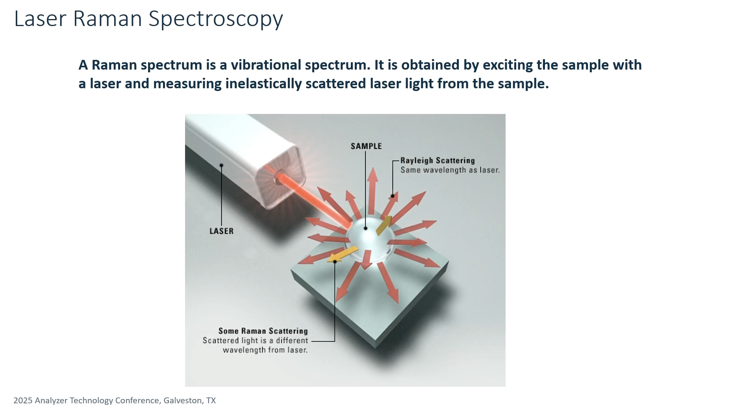But I got to go to my favorite teaching slide. So what Raman is: it is a molecular technique that takes advantage of this light scattering phenomenon, this inelastic scattering. It does provide qualitative and quantitative information on your sample matrix. It's a relatively weak process, which some of the previous talkers have already mentioned. It is accessible to solids, liquids, and gases.

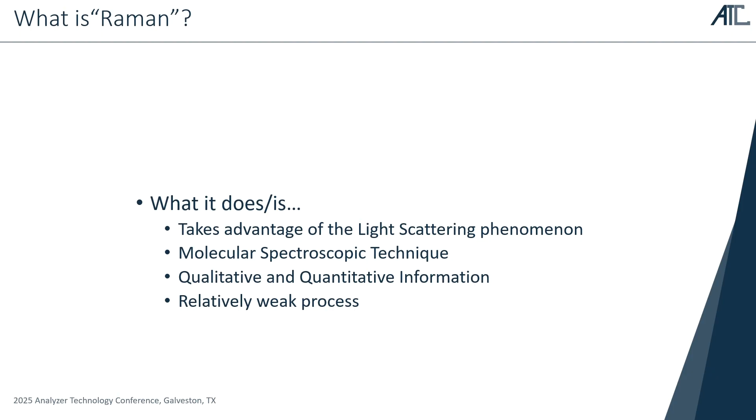But what is it not? Anybody know what's coming? I was going to go get one and then throw it to anybody who guessed it. So notice the slight spelling difference, right? I get this a lot, and everywhere you talk about Raman, it's like, yeah, it's not that.

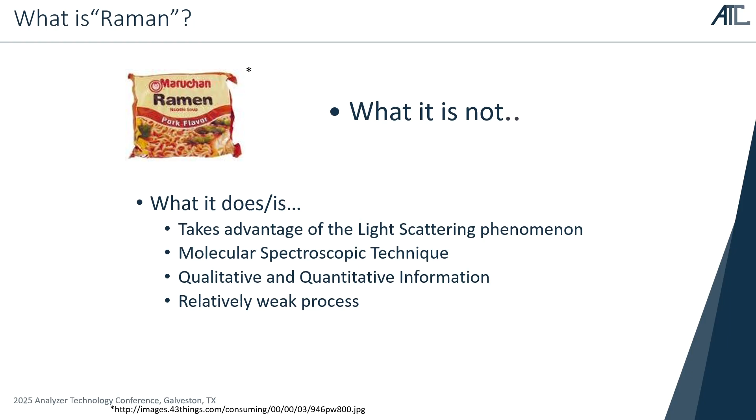But what it is is what we talked about, and we talked a little bit about Stokes and anti-Stokes. Again, if the scattered photon has the same energy, what came in came out, that's Rayleigh, we don't learn anything. And that's indicative of the big peak that you see in the center at the excitation, there's no change. With anti-Stokes, that photon actually gains a little bit of energy, and with Stokes, that photon actually loses a little bit of energy. And that gain and loss of energy is responsible for your excitation energy interacting with that molecular vibration.

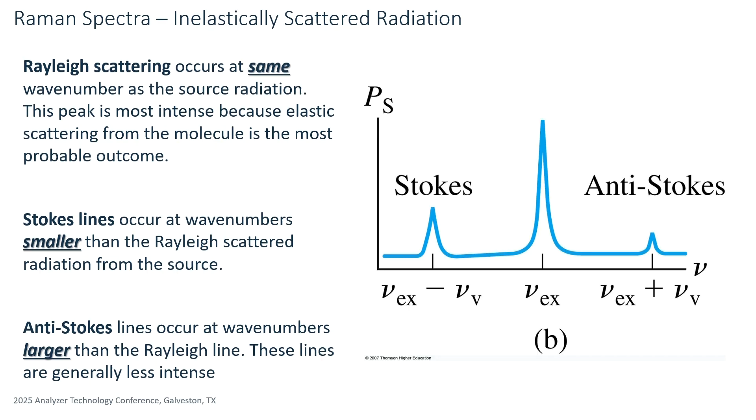Where are we all right now? We are in the ground vibrational state or ground electronic state because we just got up. Where were we last night at the open bar? Well, we were slightly elevated. We may have been in the ground electronic state. We were definitely in an excited vibrational state.

So that's why that delta in your peak intensity between Stokes and anti-Stokes occurs, because that molecule already has to be in an excited vibrational state in order for it to go to this virtual state and back down. Now, virtual state, it's very difficult to explain and to get buy-in on what a virtual state is.

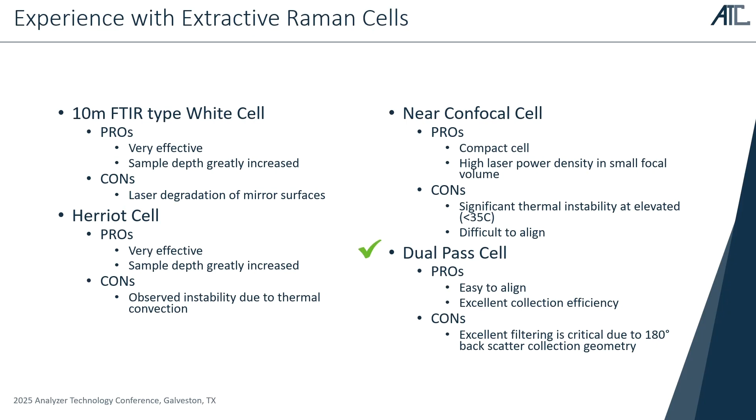So I decided to take a strong look at those individual components and see where we could eke out a little more energy, eke out a lot more signal, reduce our noise without having to go to some exotic multi-pass type cell. So some of the constraints: I want to keep that 180-degree backscatter. Why? Because it's easier to maintain that alignment. Just think, if you're trying to come in from the side and stare at a focal point of a laser at all times, that is a lot more difficult than when the beam is always in line with your collection optics. And I'll show you a little schematic here that'll make that a little more clear in a second.

Can't step on my $7 DG reading glasses. If you ever get LASIK, talk to me about it. It's not worth it. You trade one set of glasses for 5 sets of other glasses.

This public service announcement, that's free.

So something else we want to talk about is the spectrometer itself, getting that light to it. We're going to maintain the fiber optic. That way you don't have to worry about the collection arm being continuously aligned with the slit of your spectrometer. And then the spectrometer itself. We've used one spectrometer. It's probably the same spectrometer you think of when you hear miniature spectrometers, same company.

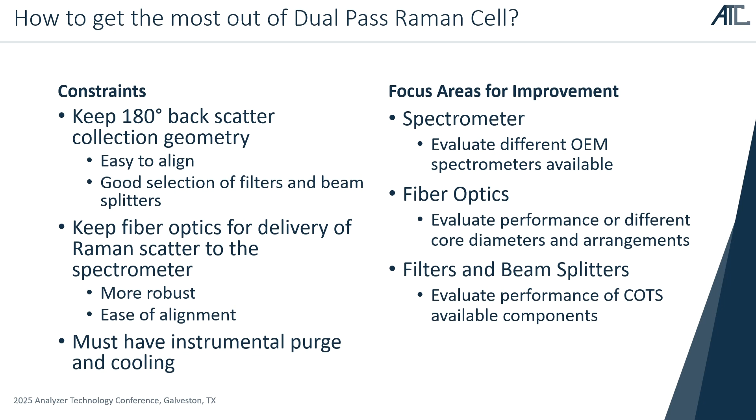But we started coming into some trouble with some of our other systems, specifically our OpenPath UV DOAS system, with changing models. So we started looking around at what other miniature spectrometers were out there. And so we started finding some others, and I wanted to compare and contrast at least 2 of those, and that's the data I'm going to present here today. The filters and the beam splitters, plenty of options available to us out there.

Now here, we're not interested in the Rayleigh scatter. Remember, green in, green out, we didn't learn anything. That hits the beam splitter this time and is redirected back toward the laser. However, that longer shifted Raman or spectrochemically relevant information passes through your beam splitter. And then it is collected by your focusing optic. There's a notch filter there.

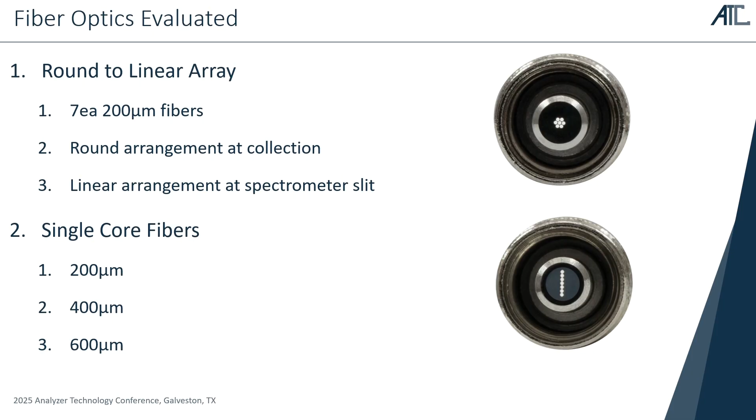What I did was I took just compressed air, put it into the analyzer, I chose the different fibers, and optimized each individual spectrometer, ran the oxygen and nitrogen through it from the compressed air, and then looked at the quality and reproducibility of our oxygen and nitrogen peaks as a function of not only spectrometer, but also of fiber.

One problem with multivariate analysis techniques is if your reference data is set to a certain standard deviation, and then you're getting data that's bouncing around that, it's gonna see that as a change in concentration, which is not necessarily the case. These are all continuous concentration, continuous flow. So I kind of zeroed in on that, and I wanted to see what it looked like.

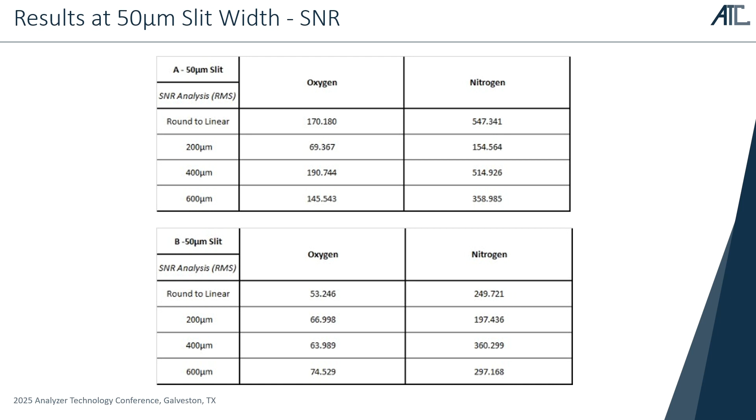So that kind of intrigued me on how this might be a better approach to our spectrometer selection, even though it's not optimized for our laser wavelength. So what are some abilities? I know we all care about oxygen, nitrogen, or we'd be doing the kicking chicken right now, right? But in terms of spectrochemical relevant information in your process, maybe you care about other things.

So what we decided to do is take some blends and some hydrocarbons and evaluate the spectrometer's ability to differentiate those different hydrocarbons. It was 7 different hydrocarbons and nitrogen and hydrogen in these blends. And you can see that the correlation curves are really good.

Now, how did I develop these correlation curves? You build your reference data set, you validate your methods on that data set. That's called verification. And then you run an entirely new data set through it. I call that validation. The first, I call it cheating. You're using the same spectra that you used to develop your method to validate your method. Okay, that's a little iffy. But come back the next day, throw something different at it, see how it performs, and then later on, continue to throw additional fresh runs at the model to check its robustness.

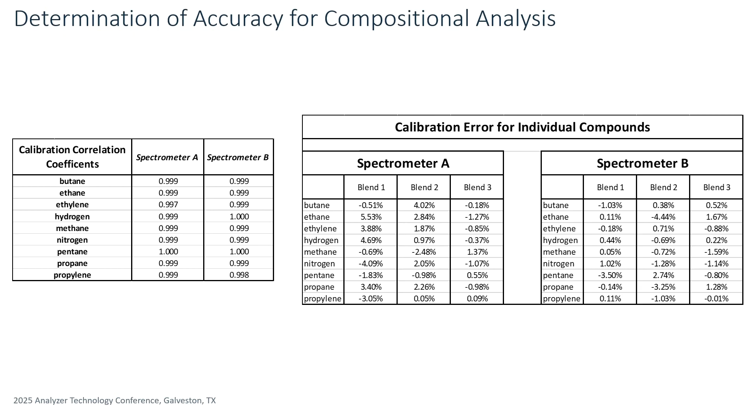What if we wanted to use this to determine your net heating value? How well would these 2 spectrometers be able to perform in that application using the EPA's PS9 evaluation criteria? Well, luckily, we have a consulting group that had all these calculations in a single spreadsheet, or I would really bore you to death with my Excel abilities to produce graphs.

So here is the PS9 results from spectrometer A. And what do you notice about that besides the red? All right, the red was where it did not pass. There, the requirement is 0.995. It came close, 0.993, but why did it fail?

If you look at your reproducibility, you can see those numbers change from the first blend to the second blend, and we are sitting about 1% or so in precision, but if you look at the calibration error, it's sitting around 1 to 3. And again, why is that? Because not only is the peak shifting on your x-axis, but it's also shifting in your intensities.

Now, solve that with TE cool? Yes, it does have a TE cooler. So I think that it's pretty much approaching its limits in terms of reproducibility, but how did spectrometer B perform? Now notice not only the calibration error, but the precision and also the linearity is also where it needs to be.

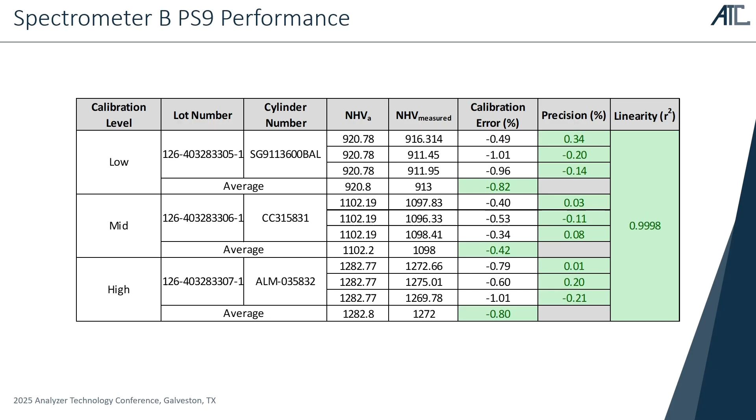So some summaries. Really think that this 2-pass cell is going to be the way to go. It does have the limitation, if you want to call it, of bringing the gas to the sample, but you can either run fiber lines or you can run gas lines. Either way is the way to get the information out of your process.

Now, these detection limits that I put up here, 0.75% to 0.1%, these are what I call the red face limits, right? I could stand there and get yelled at all day long and say, yes, I can see that. Can I see lower? Yes, we can see lower. It's very dependent on your molecule, your compound of interest.

Some people mentioned, I don't know if they mentioned it or not, it's called the Raman cross-section. That's the ability of that molecule to scatter your Raman signal so you can actually pick it up. Now, liquids, very easy. Solids, even easier than liquids. Whereas gases, way over here. They're very difficult.

Why? Because your molecules are spread apart. There's not a lot of intermolecular interactions. So it's very difficult for Raman in gases. As a matter of fact, when it first came out, it's like, just don't even bother. But we've advanced our lasers, we've advanced our spectrometers, we've advanced our optics, and that's why you're starting to see a little more conversations that involve Raman.

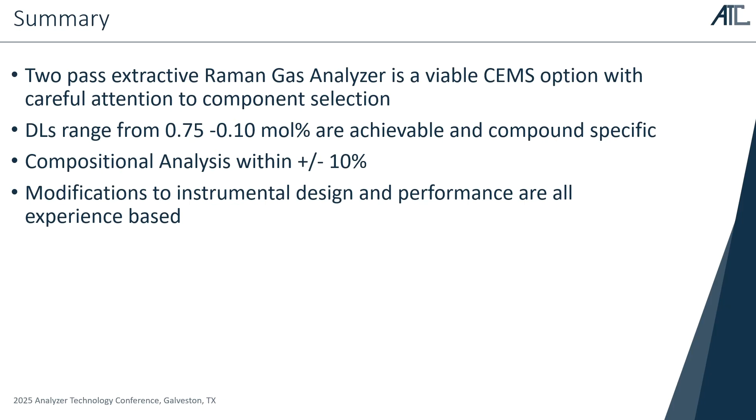What we have done is taken all of that 100-pound brain stuff and applied it to how to make it simple, make it simpler, make it more efficient, make it as good as it can be in terms of limits of detection and reproducibility. What's the end goal? To get this AMP. We met last week.

We've generated the request. We're sending it off to EPA, focusing in on the net heating value, but also with your individual component ability. And we hope to get this approved soon. And that will go a long way to assuaging any angst out there about using this technique or this capability. We're ready to go. We're ready to build it.

We have the instrument that I used to collect all this data down in our booth at 627. Again, we learned a lot from that. We made it a lot simpler to get to things, and also cooling and instrument purge. That was on my slide before, because you do pick up Raman scatter from ambient nitrogen. That gives a little variability that we can eliminate by eliminating that air background inside of the analyzer itself.

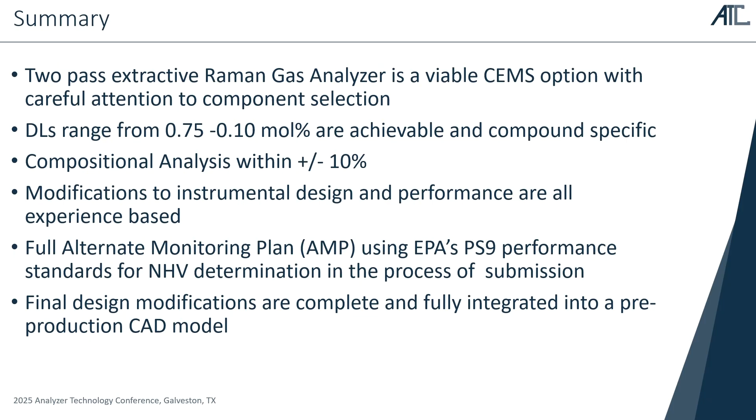And if you compare and contrast what this looks like to what our analyzer looks like down at the booth, you'll notice this is a lot simpler, a lot more access, and a lot easier to maintain and to keep aligned.

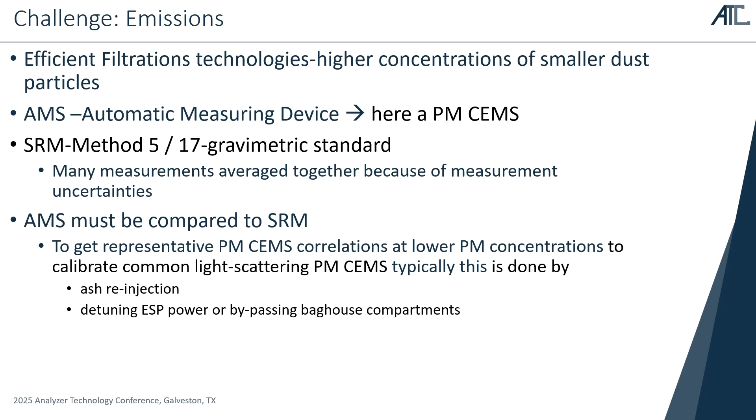So here's an example of the gravimetric reference. We compare that to the optical particulate monitor, and then make sure that it correlates properly. So we can use Method 5, which is out-of-stack measurement, grab samples, or an in-stack method of measuring the gravimetric standard. It has to comply with PS 11, Performance Specification 11, outlined by the EPA. So you have to do multiple iterations and average those out and make sure that it's reacting properly.

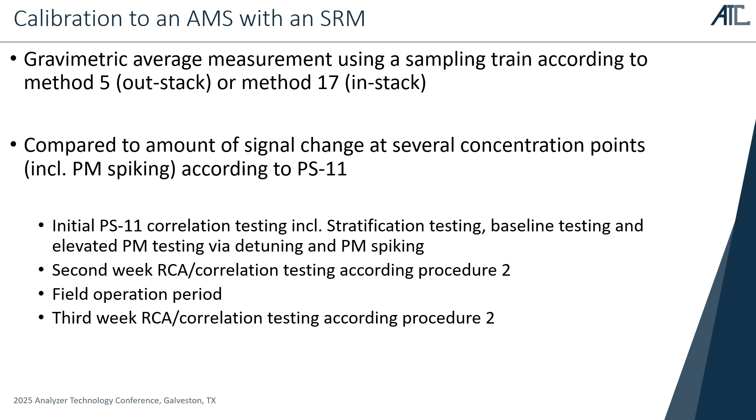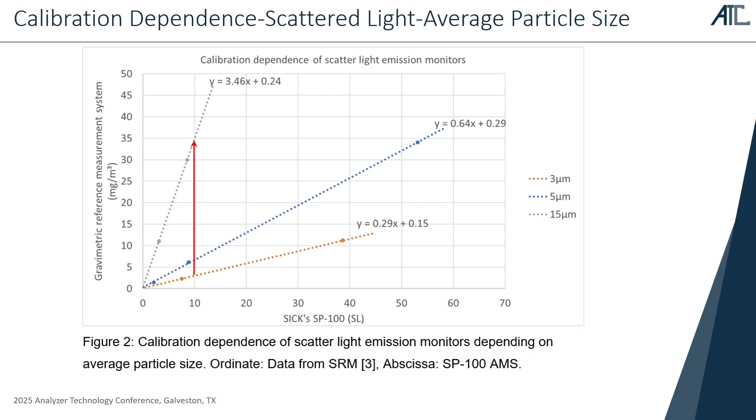And the PS 11 correlation testing usually takes 2 to 3 weeks to do. It's very involved and very expensive. So this is showing different size particles from 3 micrometers up to 15 micrometers. And light scatters differently, is affected by different particle sizes, and usually optical measurements take an average size. So if you have a lot of large particles versus small particles, it can skew your measurement.

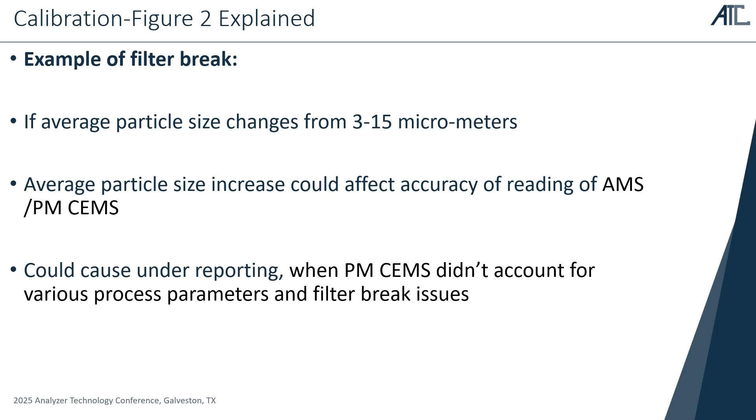So if you had a filter break, for example, and you had an average particle size increase that was due to maybe having a few larger particles versus smaller particles, you could end up under-reporting the total PM particulate monitor loading.

So here's an example of some of the filtration technologies. On the far left, there's an electrostatic precipitator where they charge the electrical plates to create a static charge, and it attracts the particles, removes them from the stack. Very, very efficient operation. Then on the right-hand side, we've got traditional mechanical bag filters. So you have fabric filters that will filter out the particulate. Once they get full, either there's a mechanism to empty them automatically, or sometimes they have to replace the bags. But if you don't pay close attention to it, the bags can rupture, and then you can get a spike of particulate matter going up the stack.

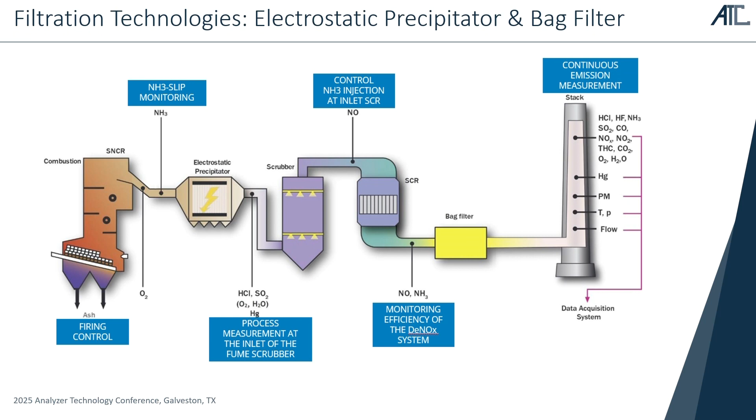If you have an issue because there's the larger particles and you don't know how many of them there are, and you get an inaccurate reading, then there's a signal sent to the ESP to ramp up that power to make it more effective, and it really didn't need to, because it's not a true particulate loading. It's a false reading, but it causes your ESP to work a lot harder than it has to, and uses up a lot more power.

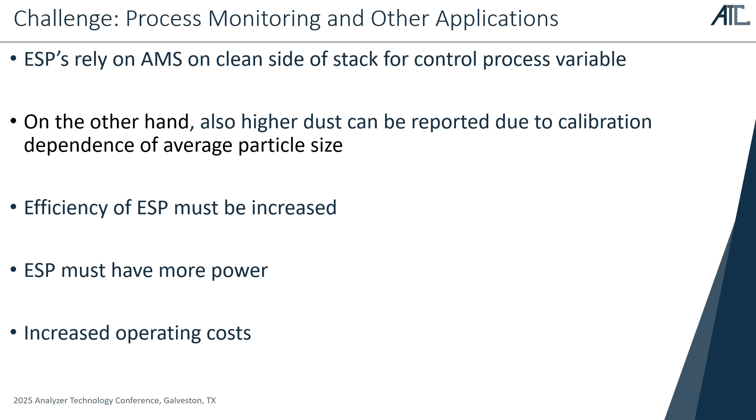So our proposed solution, and this is an emerging technology, I can't sell you one of these today. We've been working on this for several years, but it did escape from the lab. So we've got 10 industrial demonstrators that have gone around the world and been put into various applications, a lot of them in the power industry, but we're looking for other industries as well to apply the technology.

But what if, instead of just getting a total PM, particulate matter number, you could know exactly what the sizes are and the concentrations of those individual components from 0.1 to 30 micrometers. So this is what this technology is designed to do. It uses wavelengths of UV to NIR, so it has multiple sources of light, and also has multiple highly sensitive detectors, and then some mathematical modeling to come up with the PSD levels.

But initially, it needs to be referenced to the SRM, the reference method, but the hope is that we get the EPA to buy off on it, that once you've done this initial calibration, now you're making a direct mass measurement continuously, so you'll not have to do that testing on an annual basis, which is something that we haven't got approved with the EPA yet, but they're looking at the trial that we're doing in the U.S. very closely. So that would be a game changer. That would save the industry a whole lot of money.

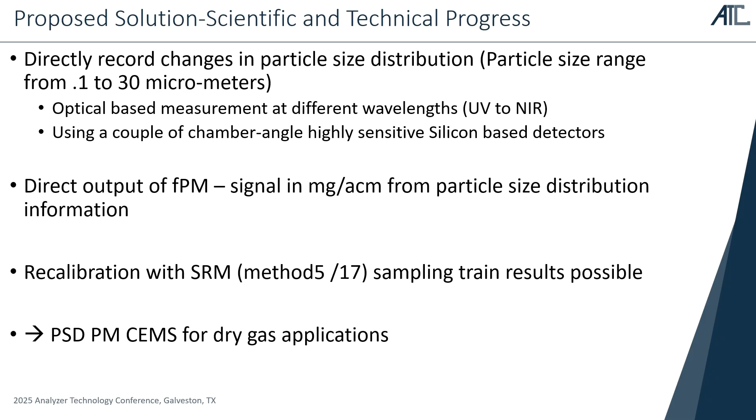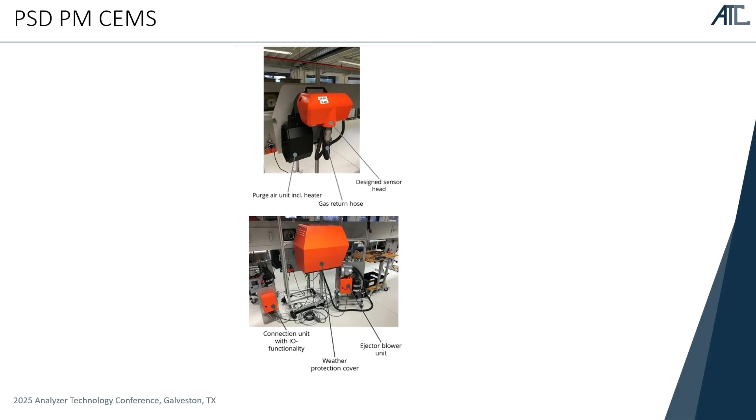So on the top is the actual sensor housing. Then we've got a purge air unit, and then the bottom picture there just shows a shroud that goes around it to protect it from the elements. It's a close-coupled extractive design, so you only have to have one flange, so it's very easy to install on the side of the stack. The unit that was installed in the U.S. went in, and in one day they had it installed, commissioned, and up and running, so very easy to install.

We've only had 1 year of run time at one location, so cleaning intervals are going to vary as far as the optics, but in that 1 year trial, we did not have to clean the optics.

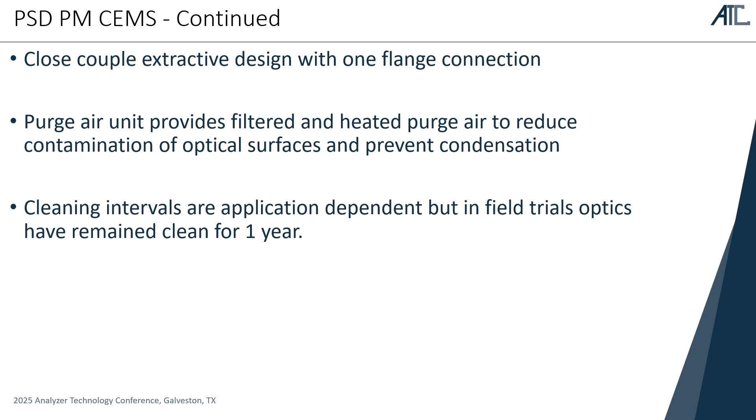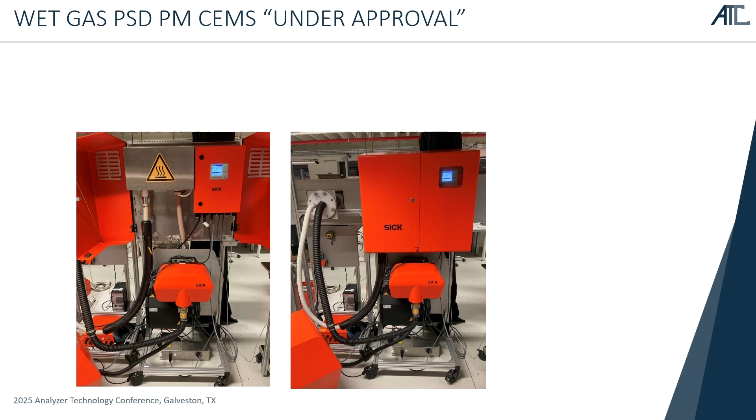So the wet gas unit that we're working on, we're hoping that will be a great success, because there are a lot of coal-fired power plants in the U.S., 80% of them are wet gas, and unfortunately the first one we developed was dry, so they retooled it and came out with the wet gas so that we could go after a bigger market size in the U.S.

So there's a thing called the MATS rule. It's a mercury air toxics regulation that came out in July of 2024, and it reduced the permissible level of particulate by 2/3. So it went from 0.03 pounds per million BTU down to 0.01 pounds per million BTU.

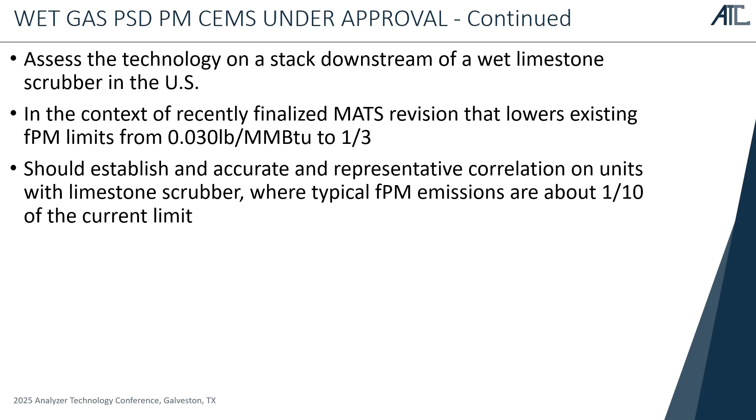So it's inherent that you continue to push the envelope and develop new technologies to get to lower levels of concentration, as well as the PSD gives them some additional information to be able to modify their filtration technologies to stay ahead of the EPA regulations.

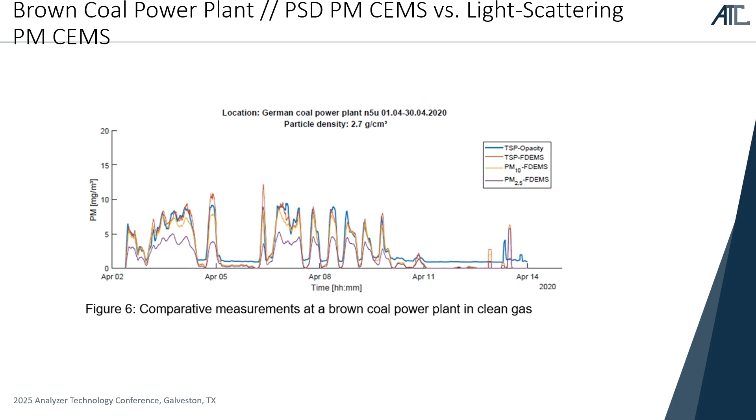And I apologize for this particular diagram here. This was a test that was run about 6 or 7 years ago, so they couldn't recreate the data for me and separate it out and explode it up and give us a good, clear view of what's going on here. But the blue line is the opacity from the existing optical opacity meter that's measuring total particulate level, and then the red line is the PSD total particulate, and it tracked perfectly on the total line.

But what the PSD gave you was the concentration of the individual particle sizes, the PM2.5, PM10, and the PM1. And so it was able to show a richer data set. So now they could tell that almost all the particles were below 10 micrometers. 50% of them were smaller than 2.5. So it gives them the information necessary to modify their filtration strategy to make sure that they eliminate those smaller components.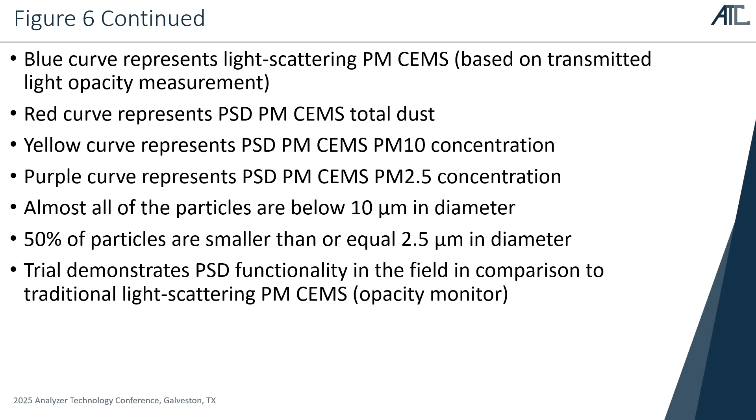So in conclusion, we are demonstrating this emerging technology for PM CEMS. It'll be a revolutionary device that, if approved and in place, will reduce the cost to industry to do the annual testing.

If you can do the first test and then let it run forevermore, and be confident that you can get the PSD, the PM1, PM2.5, and PM10 particle concentrations continuously, it will help the industry, because with that MATS rule, there were hundreds of power plants that were grandfathered and only had to do annual testing, but now they have to put in continuous PM CEMS. So they'd like to move to the next generation, which gives them a much richer data set and ability to modify their filtration strategies to stay ahead of the EPA regulations.

So it's a close-coupled extractive design, so there's no need to align optics. Everything's pre-aligned. It's very easy to install. From an expense standpoint, it's minimal and very convenient. It uses a scattered light principle and multiple wavelengths of light, and several highly sensitive detectors and mathematical algorithms to make that continuous PSD measurement.

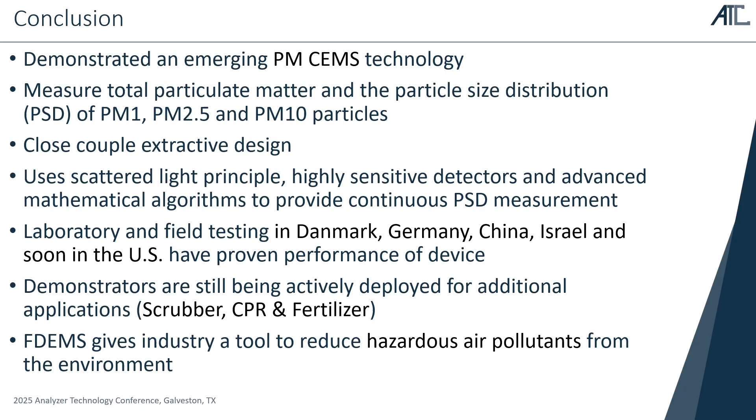And like I said, it escaped from the lab, so we've had it lab testing around the world, and also 10 industrial units that have been put in the field, grabbing empirical data to refine the design. And then we're still looking at other markets like chemical, petrochemical, refining, and fertilizer to put additional demonstrators in to prove the concept. And so this gives the industry a PSD tool to help you minimize or eliminate hazardous air pollutants from particulates. And that is it. Any questions?

Thanks, John. Do we have any questions about the presentation? I guess I have a question. Would this be applicable to municipal waste incineration, that sort of thing? Yes. And do you intend to target that market? That's not one that we have talked about, but cement is a target market, and as we all know, cement plants get extra money to incinerate medical waste and tires and things of that nature. So anything that burns and produces particulate matter would be a potential target.

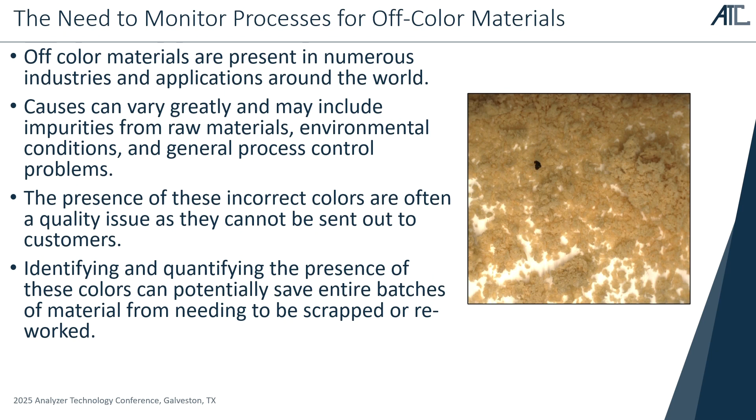So here's an introduction to vision technology and dynamic imaging. As I mentioned, dynamic imaging is the basis of our analysis, which utilizes a camera and light to take constant images of material as it flows between the camera. This technology is used in a wide range of applications across many different industries.

Other examples of applications where dynamic imaging can be used are for monitoring, for example, a produced water stream where you're trying to pick up on oil and TSS in the water stream. With dynamic imaging, Canty is able to provide both concentration and oil droplet size, which is very important for being able to efficiently separate oil and water.

Another application we can do is monitoring the foam in tanks, if you have any foaming tanks or vessels. Based on the intensity of light that the foam emits, we're able to set a certain threshold and communicate with your control system to inject anti-foam once it reaches a certain level. This is a major cost savings opportunity because operators are constantly injecting anti-foam because the only way they get in trouble is if you have over-foaming in the vessel or tank.

So going back to this specific application of off-color material, dynamic imaging has to be able to determine the difference between bad material, good material, and background material, which in this case is most likely going to be a conveyor for crumb rubber. We also need to be able to quantify the amount of bad material. This can be count of particulate that is off-color, as well as size or shape of the off-color material.

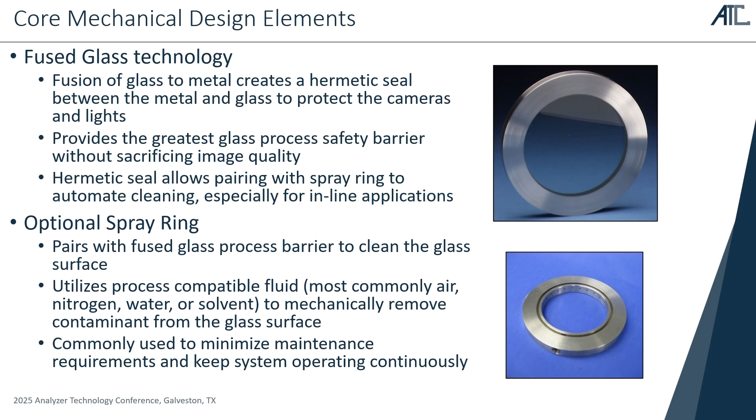So now I'll move into the lighting design. At Canty, we say that there are 3 keys to a quality image, 1 being lighting, 2 being lighting, and I'm pretty sure you can guess the 3rd, which is also lighting. With inconsistent lighting, you'll get inconsistent imaging, which in turn has inconsistent analysis. Canty has developed an LED light with a fiber optic bundle. This produces a constant, consistent white, bright light. But this also has minimum maintenance, as the light has a lifespan of over 5 years.

And as I'll dive into in the case studies more, oftentimes multiple lights are used at different angles. This will eliminate any shadow impacts to ensure that the images stay clean and clear, and this way we can perform accurate analysis with our software.

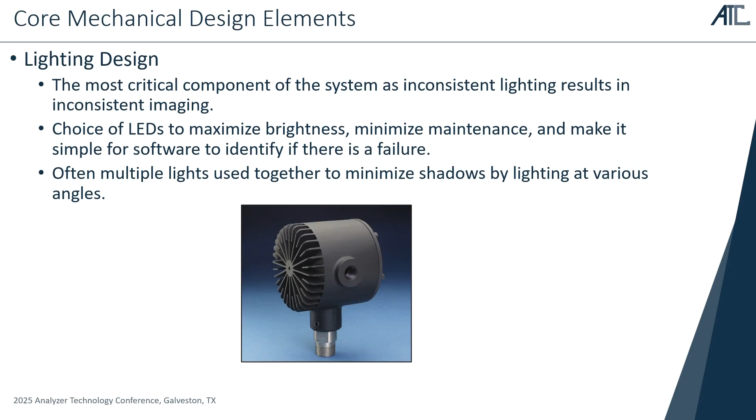Finally, the last part of the core mechanical design is the camera optics. Canty has different camera optics that can be used depending on your specific application. We'll pick one to make sure that you have an adequate view angle to ensure that you're getting the whole field of view for whatever your application may be. Each Canty camera optic has a certain pixel scale factor, which is the number of microns per pixel. For the specific application I'll be talking about today for off-color material, we'll select a pixel scale factor that is small enough to be able to pick up on all required color contaminants.

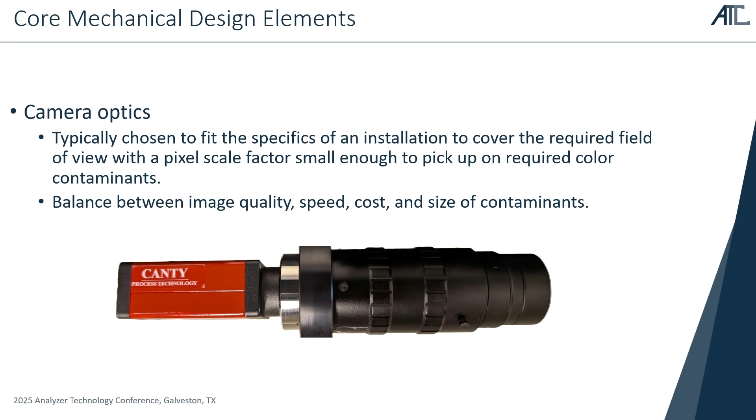So now I'll dive into the case studies. The first case study was performed at a crumb rubber plant. This was a lab analysis study. Their typical method was taking samples and analyzing them just by manual inspection and counting contaminants. Just a little bit of background. The cause of the bad color was typically due to the drying process of the crumb rubber. During heating, oftentimes particulate would get stuck on the wall, and as it stayed there, you would get some color change from the white crumb rubber, which it is supposed to be, to yellow and sometimes even black.

So just a quick couple points on lab analysis, which is the first case study. Lab analysis is a great proof of concept of the technology and for getting familiar with what it can provide, but it has certain limitations that will prompt a user to move directly inline later. One limitation is that you're not getting constant analysis. You're only pulling samples from a certain point in the line, and you're making an assumption that that's a true representative of the process as a whole, which we all know is not going to be the case.

A second limitation is you're getting a slow response time. For this specific application, they had someone go into the field, obtain a sample, run it back to the lab, prepare the analyzer, run the analyzer, and then analyze the data. By the time you analyze the data and pick up any off-color material, the bad material has already made its way to a bale, and I certainly wouldn't want that job of trying to determine which bale has that off-color material. And oftentimes, this can result in them throwing away many bales because they don't know which specific one had that contaminant.

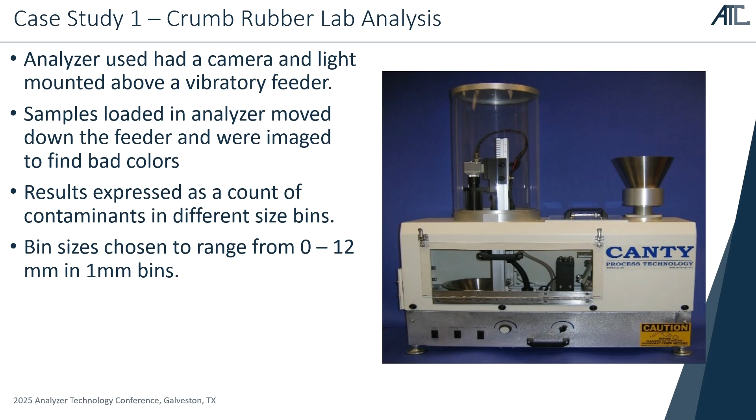For this application, results were expressed as a count of contaminants in different size bins. We're able to get particle sizing based on the pixel scale factor that I previously talked about. And bin sizes were chosen from 0 to 12 millimeters in 1 millimeter bins.

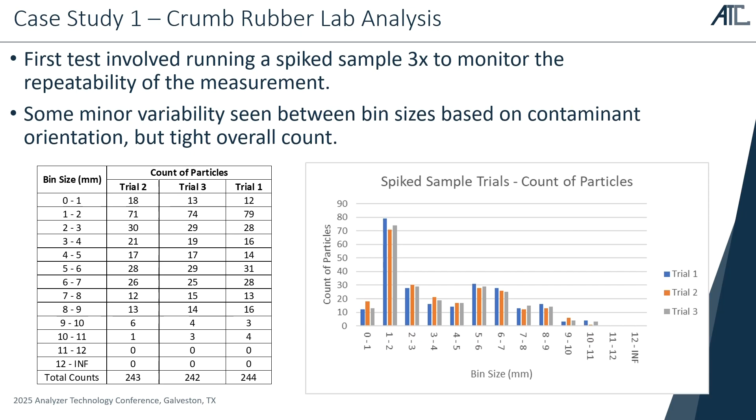So for this case study, the first test involved running a spike sample 3 times as a proof of repeatability of the analyzer. It's hard to see in the table, but results show great consistency and proof of repeatability of the analyzer, as the 3 different trials had pretty much exact total counts of particulate. The graph on the right shows the bin sizes that each of the trials had for off-color material. As you can see, the results are pretty consistent for this as well. There's some minor variability, but this is due to orientation of the particles as they present themselves in front of the camera.

So after proving the repeatability of the instrument, a second test involved running 10 samples that were taken over a span of a week of process time. As they were run through the analyzer, they were compared to the plant's manual inspection of the material for off-color material. The analyzer showed consistent results with their manual inspection, as we were within plus or minus 5% of their manual inspection. This table brings another point I wanted to make about lab analysis and its limitations.

It's hard to see, but you can see sample 8 had a total count of 127 particles that were off-color material. The rest of them didn't have nearly as much, but because you're not sampling all the time, you don't know that between sample 3 and sample 4, for example, there could be a spike in off-color material, and you wouldn't be able to tell because you're not sampling continuously.

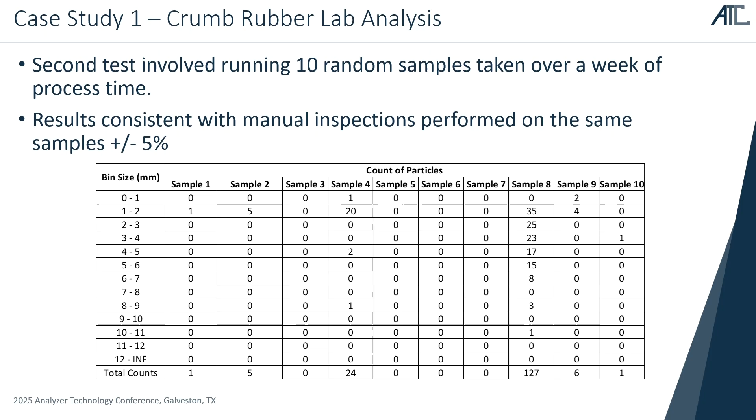So with that, I'll dive into case study 2, which was used at the same plant as in case study number 1, but measurements were made directly online. As mentioned before, the desire to measure online in real time allows for constant measurement, and you can also make instantaneous response to any issues with off-color material. For example, when off-color material was detected, we were able to communicate with the control system and redirect that specific material to a waste location until the analysis showed that there was no longer any off-color material present in the stream.

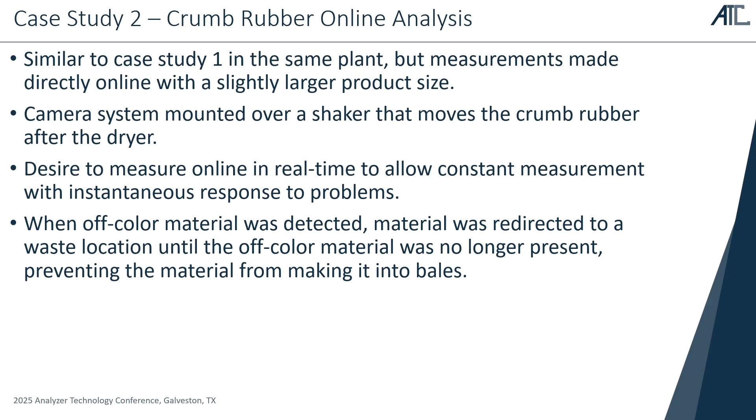So once again, the software had to be trained to look at variations of good material versus background versus bad material. The images shown on the screen show examples of contaminants detected by the software. You'll see on the left a brown contaminant, and you'll see on the right-hand side of the image a black contaminant. This makes another key point about dynamic imaging. With dynamic imaging, you're able to record videos and look back at them later. So if you want to rerun analysis based on picking up on different colors, you always have that option.

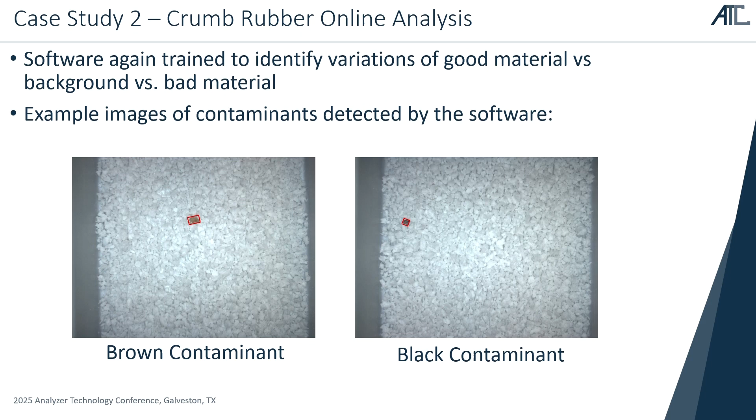The third case study differs from the first 2 in that it wasn't with crumb rubber, it was in a plastic plant that produced plastic pellets. At one point in the process, there's an extruder that has strands before they're cut into pellets. At the outlet of the extruder, it was observed that you had some off-color strands for short durations of time. The plant confirmed that this wrong color was typically either due to issues with the raw materials or some sort of process upset that they had.

The issue is with the speed that the strands were exiting the extruder, it was very difficult for a person to be able to manually inspect and determine off-color material. However, with the camera system that has a high frame rate, we're able to constantly take images and then send them to software for the same analysis that we did with the other 2 case studies.

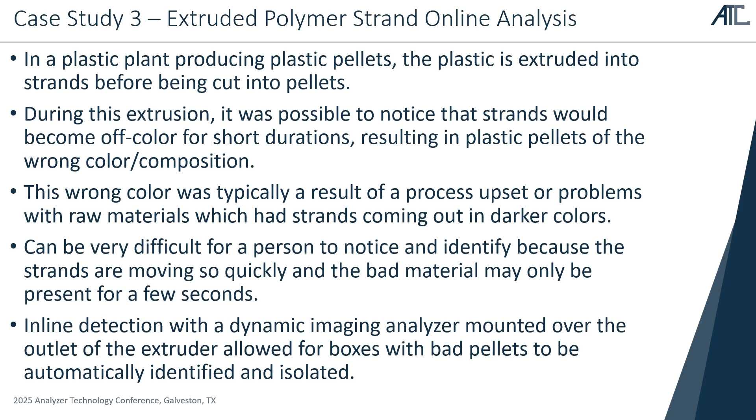The apparatus for this system is a similar concept to the first 2 with slight differences. This just used a single camera and light that were mounted above the outlet of the extruder. This camera also included the optional spray ring to ensure that the view stayed clear and consistent. And instead of expressing the material as just a count of contaminants, this case study expressed it in terms of area. As I mentioned, we also have the ability to do particle sizing based on the pixel scale factor that we set. So for this case study, we took advantage of that and expressed the bad contaminants in terms of area.

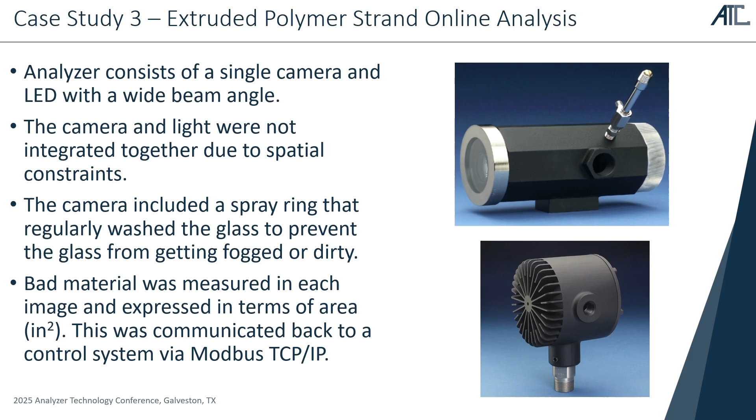Since it was difficult to easily replicate, we actually trained the software by placing bad strands of material on the extruded fibers. Examples of these can be shown on the screen here. For example, on the left side, you'll see a dark brown contaminant that we put onto the extruded fibers. The image on the left side shows the raw image that was taken, while on the right, you can see that green box, which means that the software is identifying that contaminant. And this is the same exact situation on the right side of the screen for a yellow contaminant that was also placed in the extruded fibers.

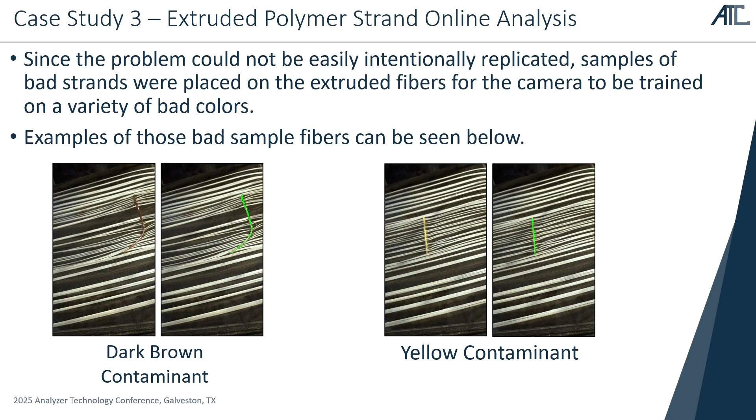So here are some conclusions of the presentation today. Dynamic imaging continues to grow and can be used in many different industries and processes for process control. As mentioned today, we can use this, for example, with off-color material to detect it and divert it so that you're not having those quality issues that you can receive complaints about from customers. Data can be output and quantified in many different ways, such as raw material count, which we discussed in the first 2 case studies, as well as any sort of size or shape distribution as expressed in the last case study. Canty has the ability to provide both lab systems and online versions.

As mentioned, there are some limitations to the lab analysis, as you're not able to constantly analyze samples and you don't have instantaneous responses as you do with online systems. Overall, this is great to put in line at one part of the process, but the great thing about dynamic imaging is you can put this all over the process and monitor it in real time and really see where you have process upsets and make changes in real time to optimize any sort of equipment or process that you have.